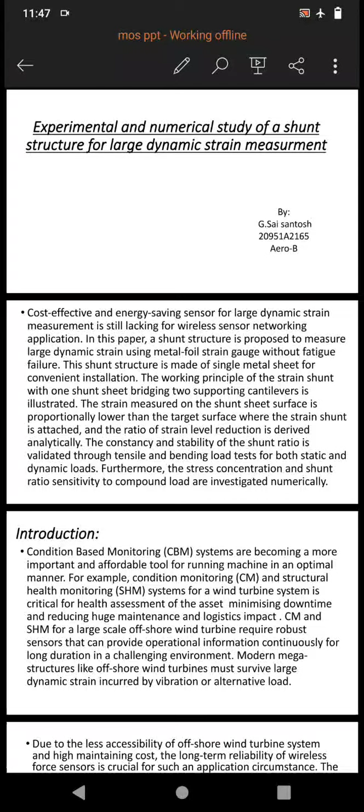Introduction. Condition based monitoring (CBM) systems are becoming a more important and affordable tool for running machines in an optimal manner. For example, condition monitoring (CM) and structural health monitoring (SHM) systems for a wind turbine system is critical for health assessment of the asset, minimizing downtime and reducing huge maintenance and logistics impact.

CM, condition monitoring, and SHM, structural health monitoring, for a large scale offshore wind turbine require robust sensors that can provide operational information continuously for long duration in a challenging environment.

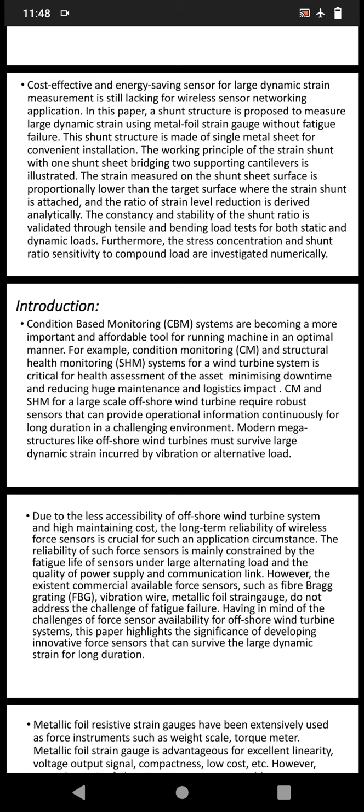Modern megastructures like offshore wind turbines must survive large dynamic strain incurred by vibration or alternating load. Due to the less accessibility of offshore wind turbine system and high maintenance cost, the long-term reliability of wireless force sensors is crucial for such an application circumstance.

The reliability of such force sensors is mainly constrained by the fatigue life of sensors under large alternating load and the quality of power supply and communication link. However, the existing commercially available force sensors such as fiber Bragg grating (FBG), vibrating wire, metallic foil strain gauge do not address the challenge of fatigue failure.

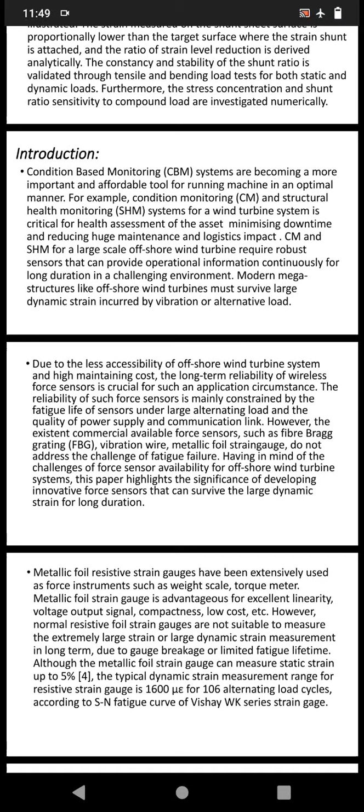Having in mind the challenges of force sensor availability for offshore wind turbine systems, this paper highlights the significance of developing innovative force sensors that can survive the large dynamic strain for long duration.

Metallic foil resistive strain gauges have been extensively used as force instruments such as weight scale, torque meter. Metallic foil strain gauge is advantageous for excellent linearity voltage output signal, compactness, low cost, etc.

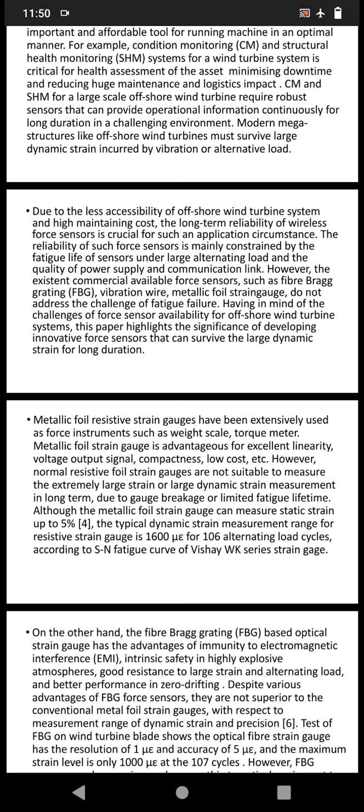However, normal resistive foil strain gauges are not suitable to measure extremely large strain or large dynamic strain in long term, due to gauge breakage or limited lifetime, although the metallic foil strain gauge can measure static strain up to 5%. The typical dynamic strain measurement range for resistive strain gauge is 1600 µε for 10^6 alternating load cycles according to S-N fatigue curve of Vishay WK series strain gauge.

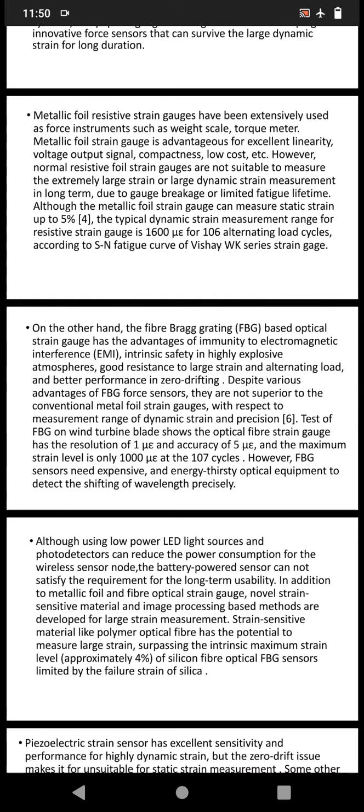On the other hand, the fiber Bragg grating (FBG) based optical strain gauge has the advantages of immunity to electromagnetic interference (EMI), intrinsic safety in highly explosive atmospheres, good resistance to large strain and alternating load, and better performance in zero drifting.

Despite various advantages of fiber Bragg grating sensors, they are not superior to the conventional metal foil strain gauges with respect to measurement range of dynamic strain and precision. A test of FBG on wind turbine blade shows the optical fiber strain gauge has a resolution of 1 and accuracy of 5, and the maximum strain level is only 1000 at 10^7 cycles.

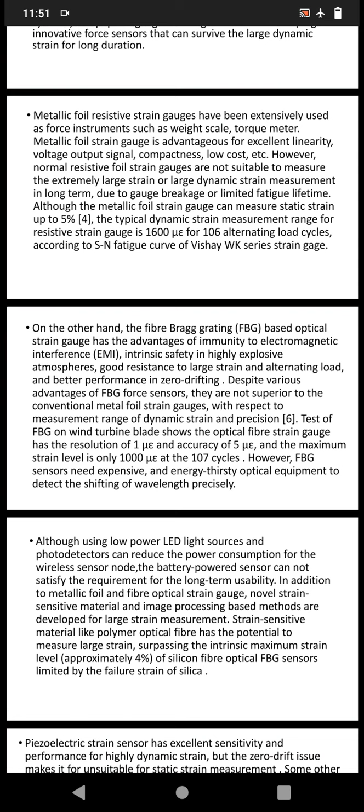However, FBG sensors need expensive and energy thirsty optical equipment to detect the shifting of wavelength precisely. Although using low power LED light sources and photo detectors can reduce the power consumption for the wireless sensor node, the battery powered sensor cannot satisfy the requirement for long term usability.

In addition to metallic foil and fiber optical strain gauges, novel strain sensitive material and image processing based methods are developed for large strain measurement. Strain sensitive material like polymer optical fiber has the potential to measure large strain, surpassing the intrinsic maximum strain level, approximately 4%, of silica fiber optical FBG sensors, limited by the failure strain of silica.

Piezoelectric strain sensor has excellent sensitivity and performance for highly dynamic strain, but the zero drift issue makes it unsuitable for static strain measurement. Some other photography methods for large strain measurement are based on high resolution digital camera technology.

For example, digital image correlation of speckle pattern on the target surface is ideal to measure large static strain on a large area. However, these optical solutions may be restricted by non-vibratory conditions as well as high power consumption and equipment cost. Thereby, they are excluded from massive deployment in industrial scenarios, in particular offshore wind turbine condition monitoring and structural health monitoring.

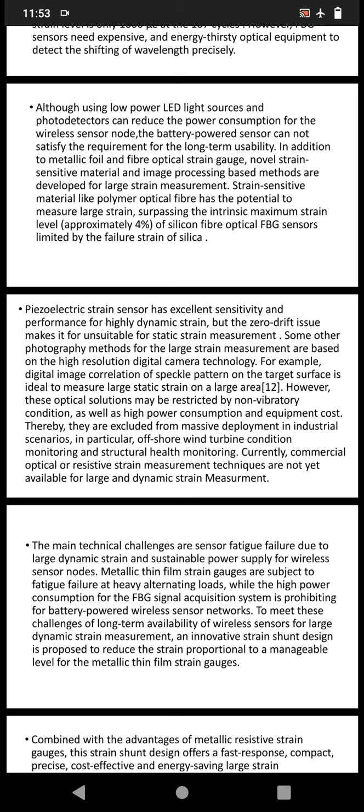Currently, commercial optical or resistive strain measurement techniques are not yet available for large and dynamic strain measurements. The main technical challenges are sensor fatigue failure due to large dynamic strain and sustainable power supply for wireless sensor nodes. Metallic thin film strain gauges are subjected to fatigue failure at heavy alternating loads, while the high power consumption for the FBG signal acquisition system is prohibitive for battery powered wireless sensor networks.

To meet these challenges of long term availability of wireless sensors for large dynamic strain measurements, an innovative strain shunt design is proposed to reduce the strain proportionally to a manageable level for the metallic thin film strain gauges. Combined with the advantages of metallic resistive strain gauges, the strain shunt design offers a fast response, compact, precise, cost effective, and energy saving large strain measurement solution.

The metal sheeting process aims at simplified manufacturing, relieved stress concentration by the fillet structures and convenient installation. An adhesive bonding process similar to the traditional strain gauge adhesive installation process is introduced to accelerate the field installation. The bonding method extends the application of the strain shunt to non-metal surfaces such as composite material.

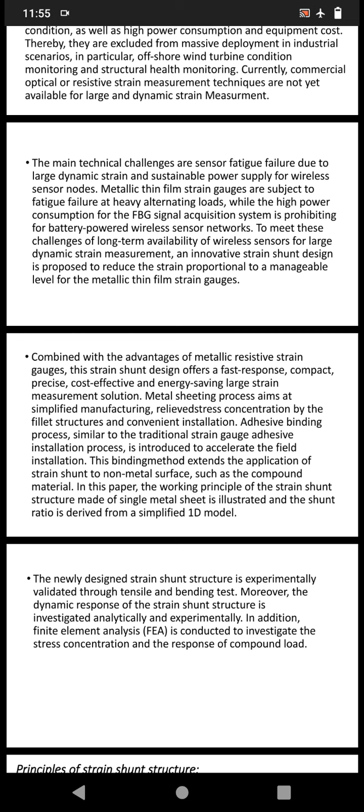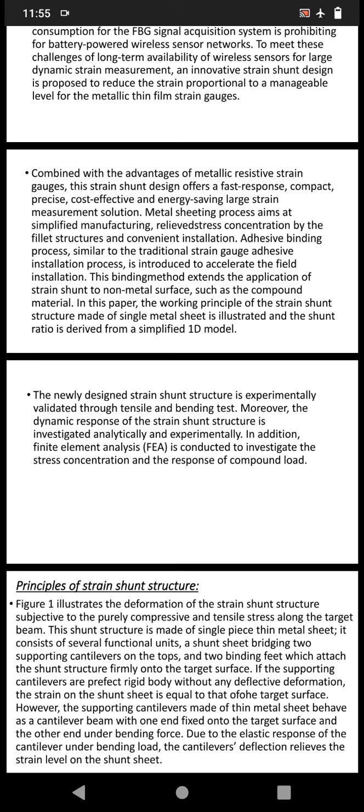In this paper, the working principle of the strain shunt structure made of single metal sheets is illustrated, and the shunt ratio is derived from a simplified 1D model. The newly designed strain shunt structure is experimentally validated through tensile and bending tests. Moreover, the dynamic response of the strain shunt structure is investigated analytically and experimentally. In addition, finite element analysis (FEA) is conducted to investigate the stress concentration and the response to compound load.

Principles of strain shunt structure. Figure 1 illustrates the deformation of the strain shunt structure subjected to purely compressive and tensile stress along the target beam. This shunt structure is made of a single piece of thin metal sheet. It consists of several functional units: a shunt sheet bridging two supporting cantilevers on the top, and two binding feet which attach the shunt structure firmly onto the target surface.

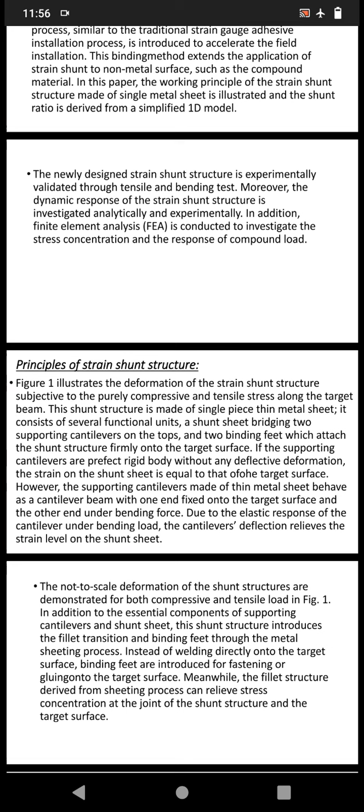If the supporting cantilevers are perfectly rigid bodies without any deflective deformation, the strain on the shunt sheet is equal to the target surface. However, the supporting cantilevers made of thin metal sheet behave as a cantilever beam with one end fixed onto the target surface and the other end under bending force. Due to the elastic response of the cantilever under bending load, the cantilever's deflection relieves the strain level of the shunt sheet.

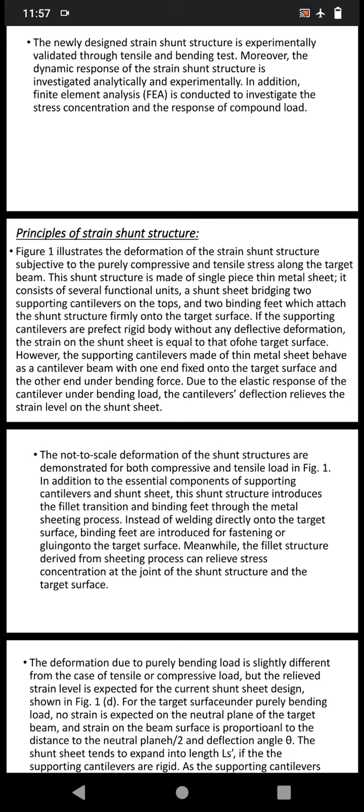The not-to-scale deformation of the shunt structures is demonstrated for both compressive and tensile load in figure 1. In addition to the essential components of supporting cantilevers and shunt sheet, these shunt structures introduce the fillet transition and binding feet through the metal sheeting process. Instead of welding directly onto the target surface, binding feet are introduced for fastening or gluing onto the target surface. Meanwhile, the fillet structure derived from the sheeting process can relieve stress concentration at the joint of shunt structures and the target surface.

The deformation due to purely bending loads is slightly different from the case of tensile or compressive load, but the relieved strain level is expected for the current shunt sheet design shown in figure 1. For the target surface under purely bending load, no strain is expected on the neutral plane of the target beam. Strain on the beam surface is proportional to the distance to the neutral plane and deflection angle theta.

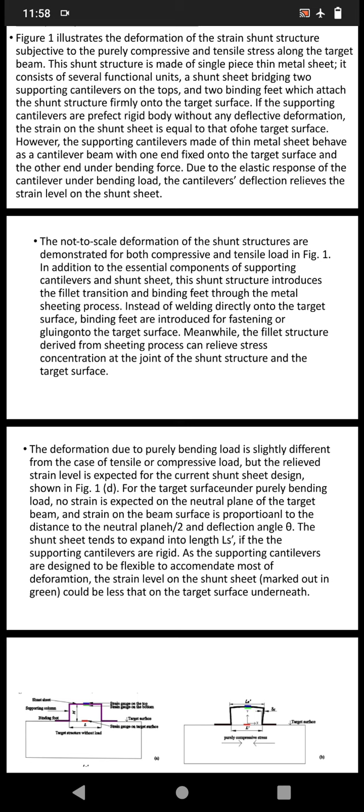The shunt sheet tends to expand to length Ls if the supporting cantilevers are rigid, but the supporting cantilevers are designed to be flexible to accommodate most of the deformation. The strain level on the shunt sheet marked out in green could be less than on the target surface underneath.

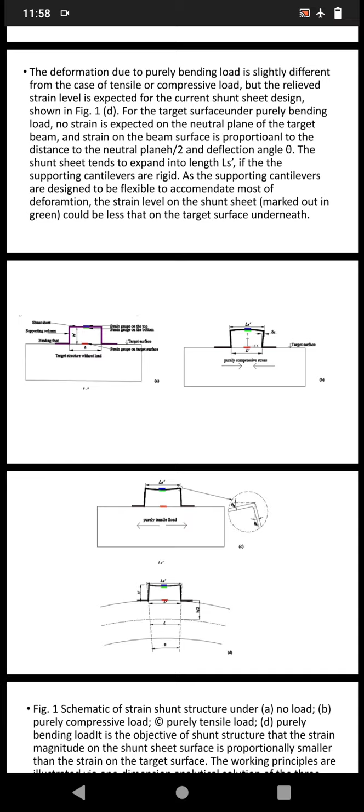Schematic of strain shunt structure under A. No load. B. Purely compressive load. C. Purely tensile load. D. Purely bending load. It is the objective of the shunt structure that the strain magnitude on the sheet surface is proportionally smaller than the strain on the target surface. The working principles are illustrated via a one-dimensional analytical solution of a three beam structure under purely compressive or tensile load. The following relationship of deformation along the load direction is proposed.

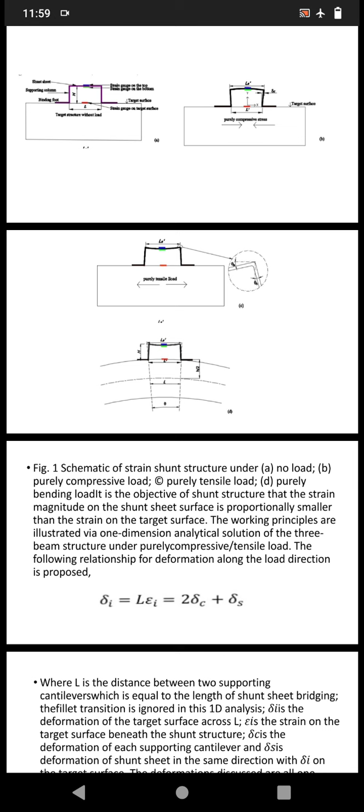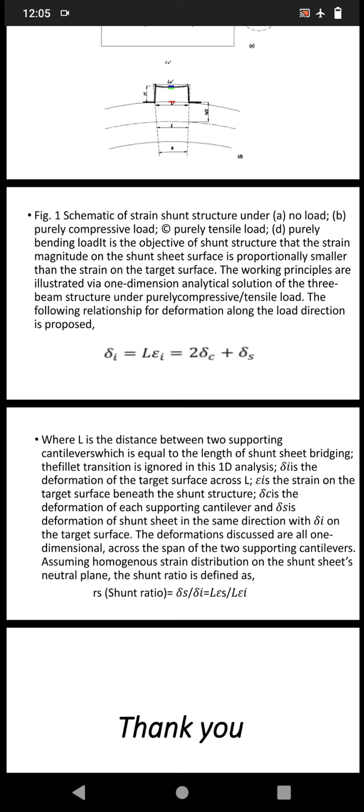Where L is the distance between two supporting cantilevers, which is equal to the length of the shunt sheet bridging them; the fillet transition is ignored in this 1D analysis. Delta I is the deformation of the target surface across L, and epsilon I is the strain on the target surface beneath the shunt structure. Delta C is the deformation of each supporting cantilever, and delta S is the deformation of the shunt sheet in the same direction as delta I on the target surface. The deformations discussed are all one-dimensional across the span of two supporting cantilevers.

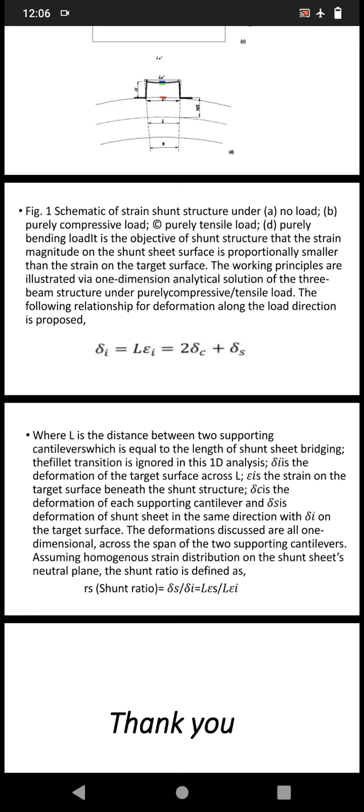Assuming homogeneous strain distribution on the shunt sheet's neutral plane, the shunt ratio is defined as RS, shunt ratio, equal to delta S by delta I.